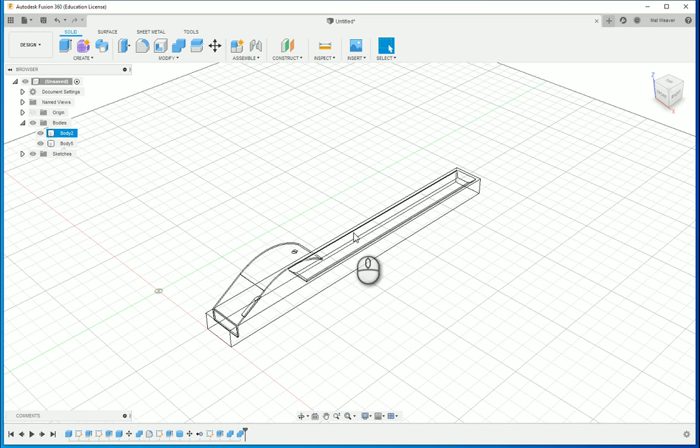Okay, so this is where I left you in the previous video. What we can do first is just go to the visual style and fill it in a bit more.

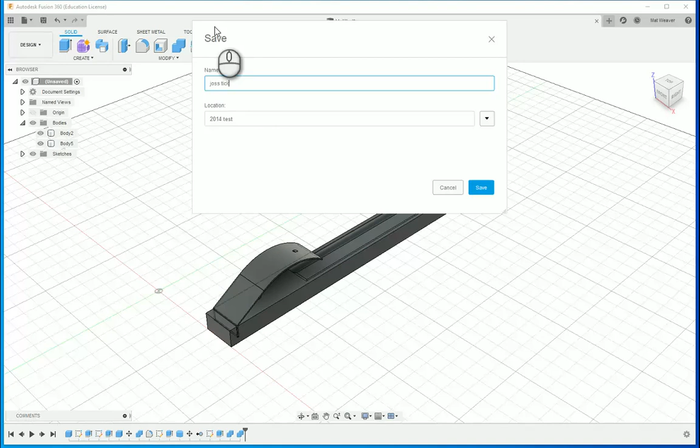Okay, the quickest way to do this is save your file. I've got several of these, so joss stick, and I think I'll do 2020 because I've got loads.

Okay, then go to here where it says design, go drawing from design. Now this hasn't worked for one of you, so we'll see if it works.

We want the full assembly if you've deleted that joystick. If you haven't deleted the joystick and you do full assembly, and you've just hidden the joystick itself, and then you put a measurement, the person taking this will make the joystick for you, and that's just going to be weird. So what we're going to do is full assembly, there's nothing else, it's just this piece of metal and this piece of wood.

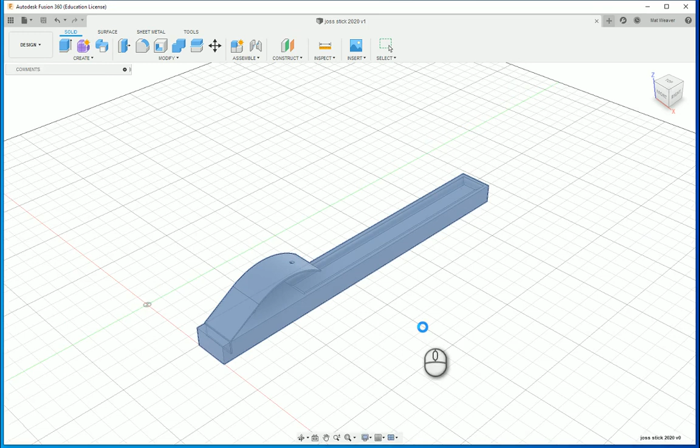We're going to put it on A3 because that will allow you to do it one-to-one, which is good, because if you do it one-to-one and your measurements are slightly inaccurate but you like the size of it, you can actually say use this as a template.

So we've got our piece of paper. There's my name, everything else you'll delete that, or I'll take it out. The scale I said is 1-to-1, so we can simply just put 1.

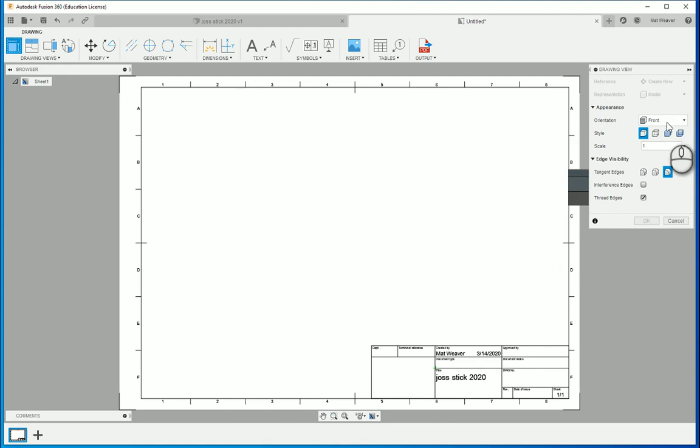And the orientation first will be the side view, so we're actually going to put side view. Let's do the right side view. So it goes across, and I'm going to put it to this side of the page.

Now the way we're going to do this is something called orthographic, and it's called third angle orthographic. I'll show you how to make sure you get third angle in a minute, but it does mean you're going to have to set it up.

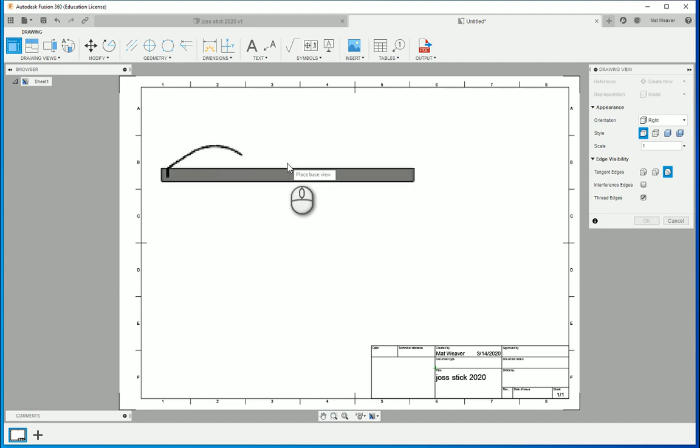So what happens is the side is here, the top is here, and then the front or the back is there. So if I click this one, we want the hidden edges to be shown. Actually, just do that one.

Okay, so already you can see everything there is that you need to put in there.

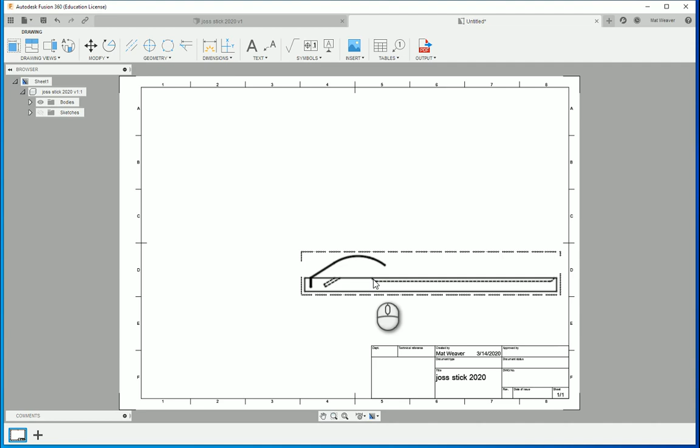If I go here, drawing view, click that, and then move it up, and here for the side, and then I can also do that there, press return.

I can double click that, and I can go 1 to 2 to make it smaller, and I'll show you what to do with this one in a minute. Move that there, and here I've got the basis for all the dimensions.

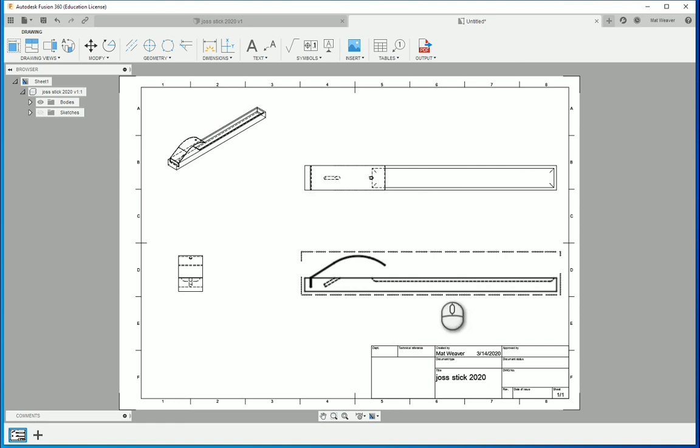That was me zooming in. The first thing I do is go to dimensions here, or drop down.

Now these ones are automatic dimensions, so if I click that, it should snap to the corner, and there you go, that's 230.

So 230 millimeters is the entire thing, and because it's orthographic, this is exactly the same as that, which means I don't need to do this measurement again. In fact, if I did this measurement again and got it slightly wrong, then the manufacturer is going to get it wrong as well.

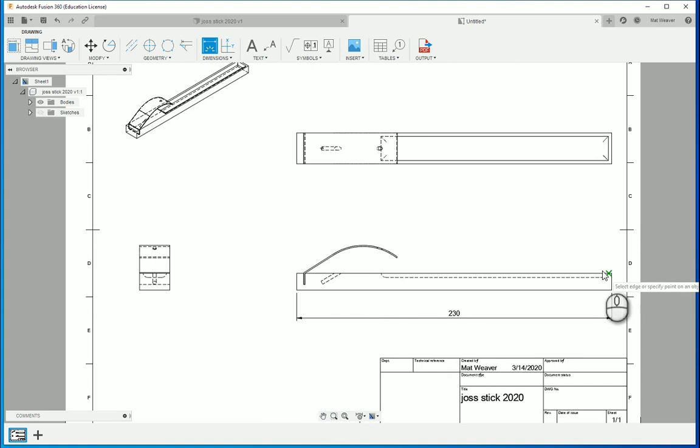This dimension from here to here is the same as the dimension from there to there, so I only need to do that. This dimension, so how deep are you drilling it, from there to there, can be put in.

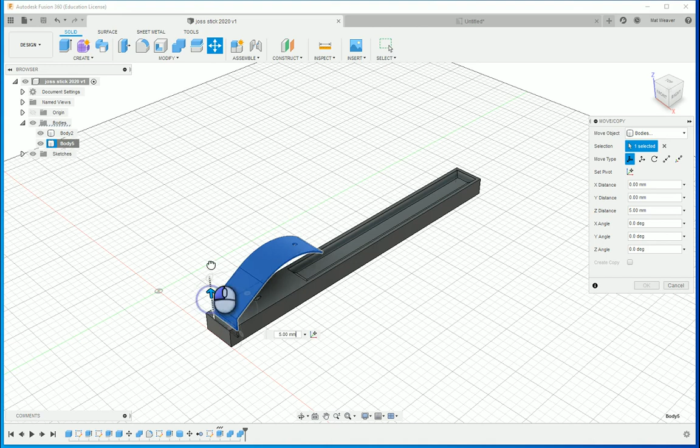And the only trouble now is this one could have been done on its own. So if I go back here and remember that body, I'll right click and move it just a little bit higher, press OK, save, and you're going to see a small symbol come up.

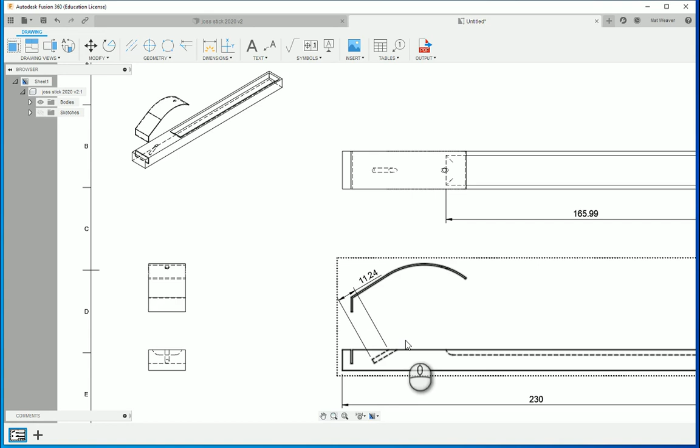And I go back here, you see that symbol there? That means there's a different version I'm using, and it's not in synchronization. If I click this, it should sync, and you'll see that's now raised. It's important that you do raise that, because then the person knows it's a different material. So now I can move this back down.

And I can start doing some special dimensions to the metal itself. So there to there, I believe, is straight, and then the curve starts. The curve's a little bit difficult. Because this is 1 to 1, I can say this is A3, please make this 1 to 1. That will make my life a bit easier.

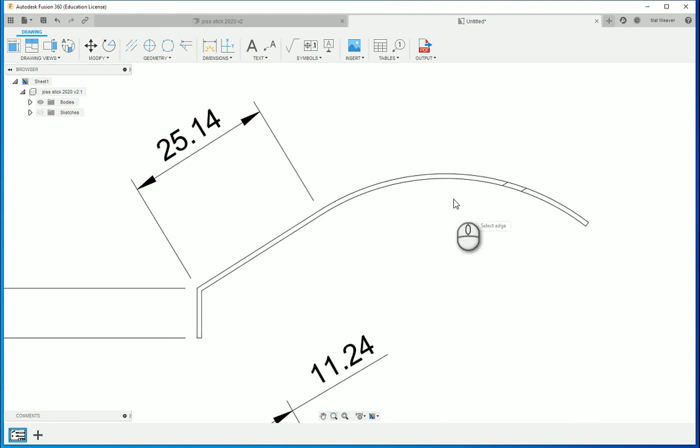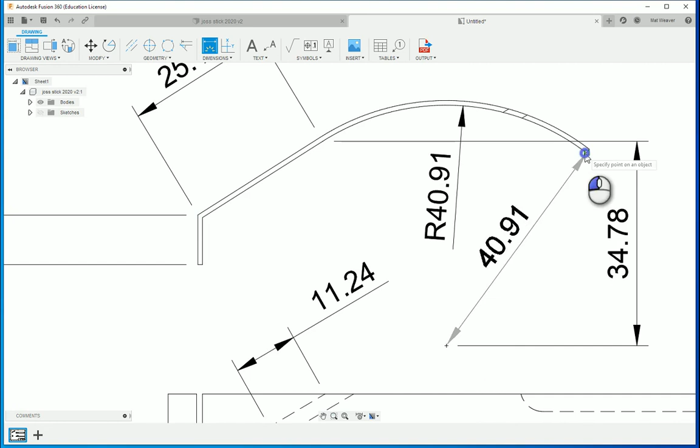Or I can say the radius of that circle is 40.91. The radius is there, so I can also go from the beginning line to there, say exactly where that radius is, which is sort of important one there. Oh, we know that one. Okay, so there's going to be a lot of dimensions here.

Now we've got the hole size here, which is there, so I can go dimensions. Let's go do the diameter for the hole itself. It's not going to do it, is it? Because it's at an angle.

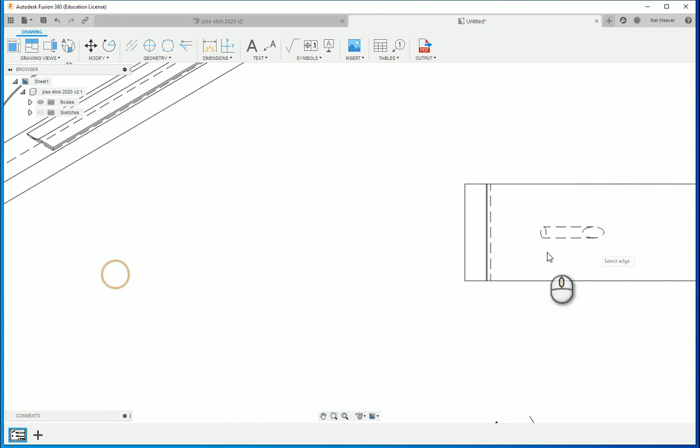Nope. Okay, so the best way to get the diameter for that is to go dimension, 1, 2, and you remember you can check that I actually made that 2.5, and we'll do it there as well, and that should be 2.5.

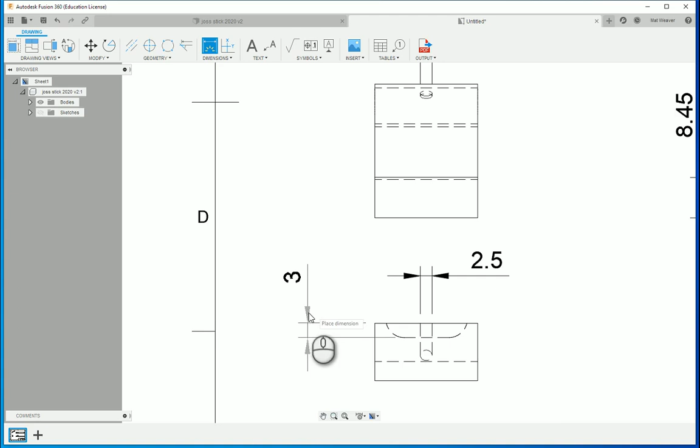Okay, and then I've got the depth, which is 3 mil, and I can even put this dimension there, and this dimension here, that dimension.

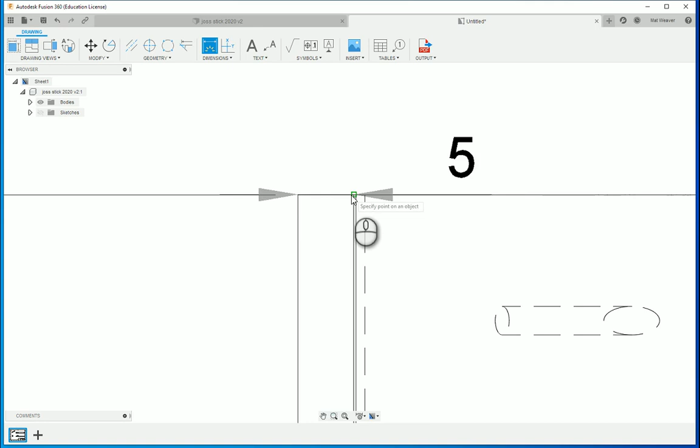It's interesting, it's a double line because that's looking at the metal there, and the dimension from there to that hidden area is 1 mil.

And it's your job to get as many of these dimensions as possible. Now I should also be able to remember I said that was a 4 as well. And you want all the dimensions, absolutely every single dimension there, so that there is no room for mistakes.

Here I'm going to add text. So I'm going to say this is teak. And I also want this to be polished. Okay, so I can say teak needs to be sanded smooth and then waxed.

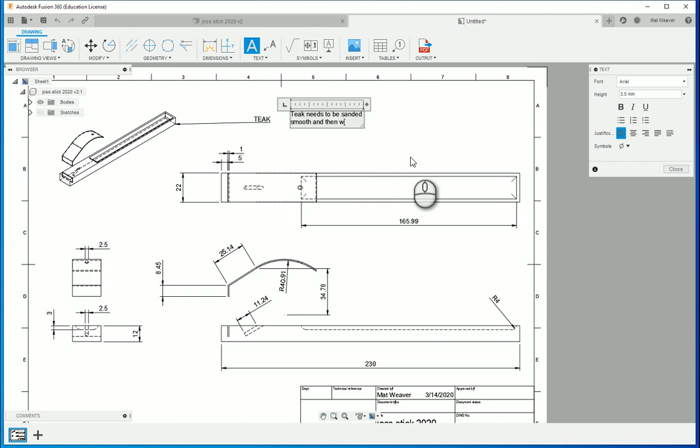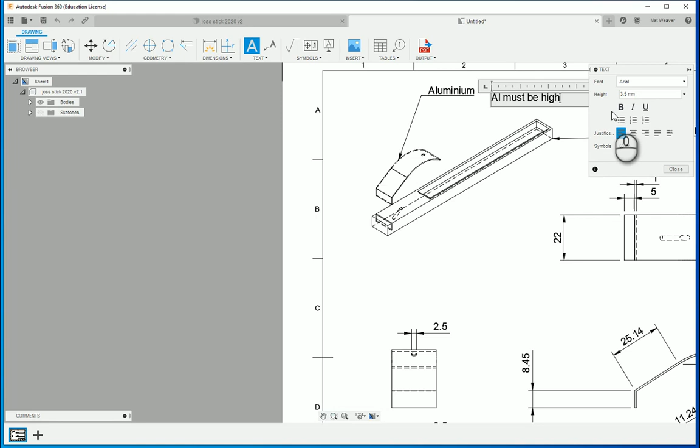Okay, and with the metal, we've been doing a little bit of experimentation with metal - aluminium, and with the aluminium I want this highly polished. Okay, so AL must be highly polished, mirror finish. You could even write mirror finish if you want.

Okay, so when you've done that and you're happy - I haven't even talked about the glue, so I could say needs to be glued in. I've got loads of things that I could be talking about.

What you're going to do then is output that as a PDF. So you're going to click this, save it as a PDF, and then you'll hand that file in, and we'll make sure that everything goes to the right people. Remember, you can't write too much in this - write as much as possible to make sure that they make your final thing.

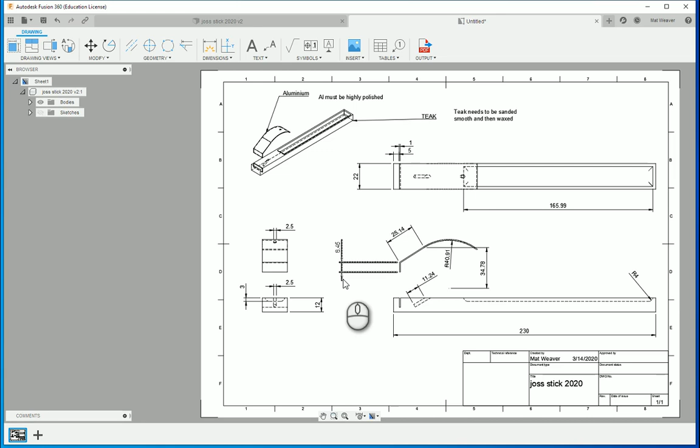In the next video, I'll show you how to make a graphical representation so that they can check to see if they've made the correct thing.